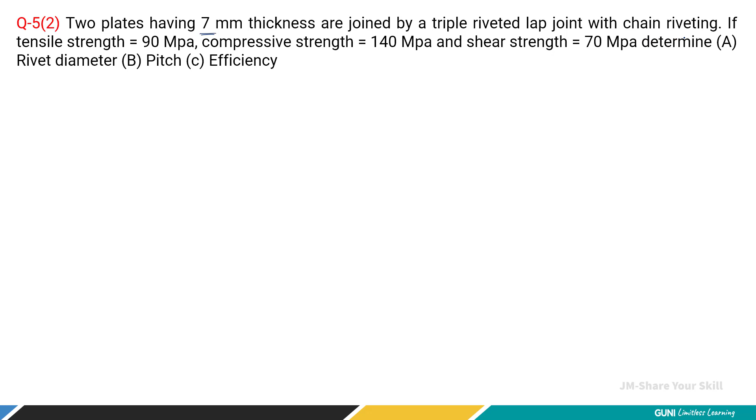Students, let's solve the problem of riveted joint. Question number 5 from assignment 2. Two plates having 7 mm thickness are joined by triple riveted lap joint with chain riveting configuration. If tensile strength is 90 megapascal, compressive strength is 140 and the shear strength is 70 megapascal, then find the rivet diameter, pitch and efficiency.

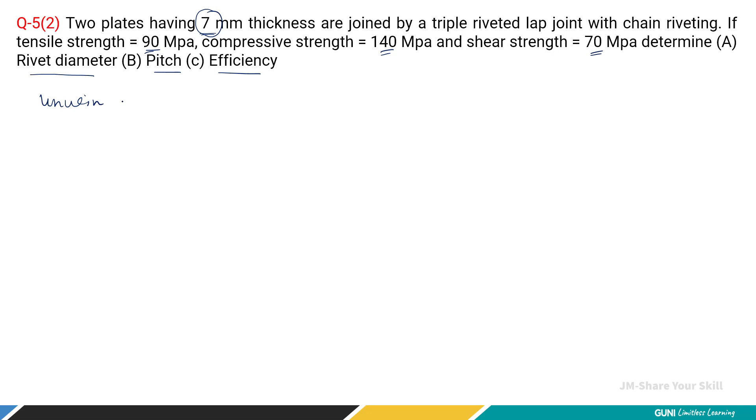Now here the plate thickness is 7 mm. As per Unwin's formula or Unwin's theory, when the plate thickness is equal to or greater than 8 mm, you can use rivet diameter d = 6√t to find the rivet diameter, right? But here the plate thickness is 7 mm, so we cannot use this formula.

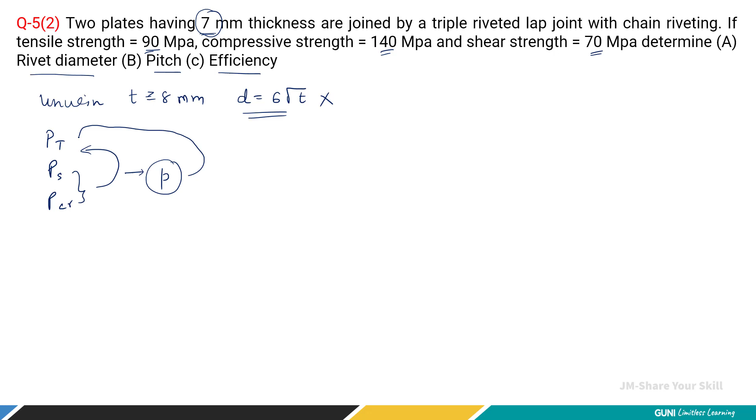So first we have to find out the tearing strength, then shearing strength and crushing strength, right? Out of the shearing and crushing strength, whichever is less must be compared with the tearing strength, then we can find the pitch. Once we find the pitch, we can replace that pitch value in the tearing strength to find out the rivet diameter. So this is our workflow, because the plate thickness is 7 mm, you cannot use Unwin's formula.

So let's continue. Tearing strength of plate Pt is equal to (p minus d) into t into sigma t. Pitch is not known to us, even rivet diameter is not known to us, only plate thickness 7 mm is known, and the tensile strength is 90 megapascal. So let's simplify the equation. It is 630 (p minus d) Newton.

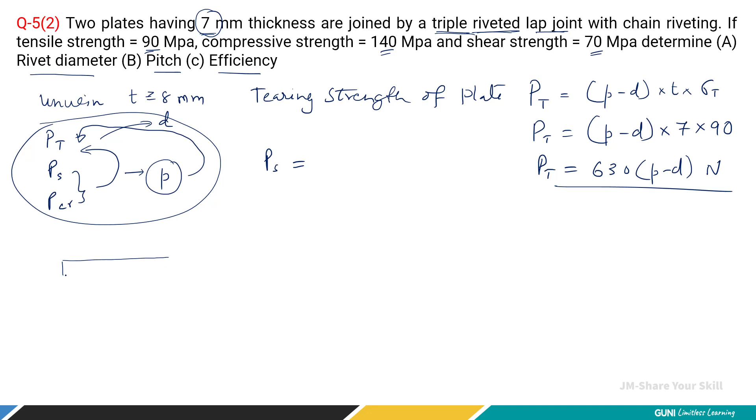Now shearing strength: here we have to consider the type of joint. It is a triple riveted lap joint. If I draw the simple configuration to understand what is given in the numerical, this is lap joint, and here we have 3 rows of rivets. So n is equal to 3. Ps is n into pi by 4 d square into tau, with n equal to 3 because it is triple riveted.

Then pi by 4 d square into tau. The shearing strength is given as 70 megapascal, right? So let's put 70 and simplify the equation. It comes out to be approximately 165 d square Newton.

Now let's find the crushing strength. The crushing strength equation is again number of rivet rows n into d into t into sigma cr. Let's take n equal to 3 as it is a triple riveted lap joint. Rivet diameter is not known, the plate thickness is 7 mm and crushing strength is 140 megapascal. Simplifying, we get 2940 d Newton.

Now we have to compare the shearing strength and the crushing strength of the rivet to find out the rivet diameter. So we equate Ps equal to Pcr: 165 d square is equal to 2940 d. We cancel out one d and find the rivet diameter. It comes out to be 17.81, and we take the approximate round value of 18 millimeter.

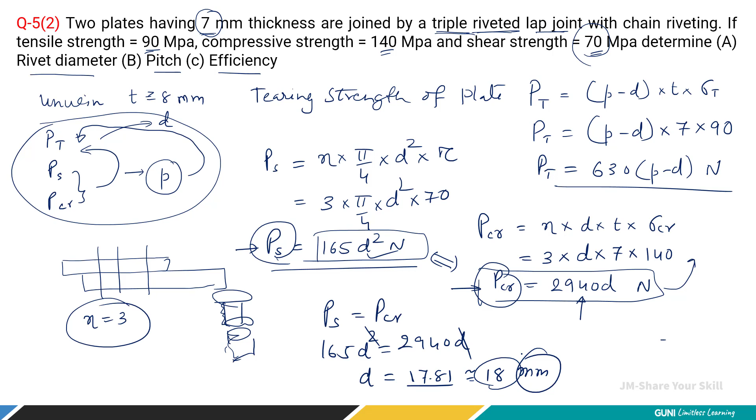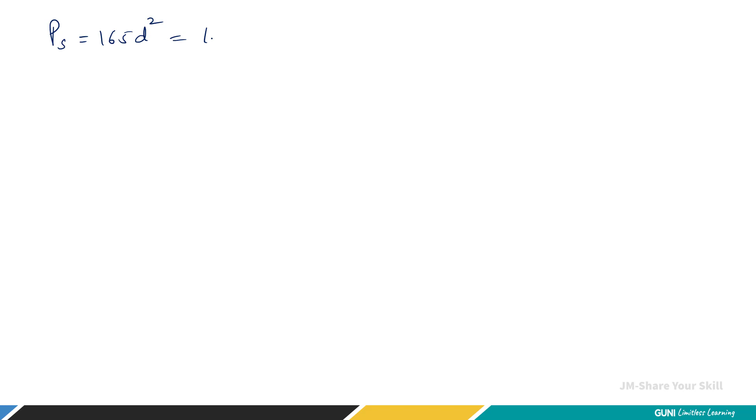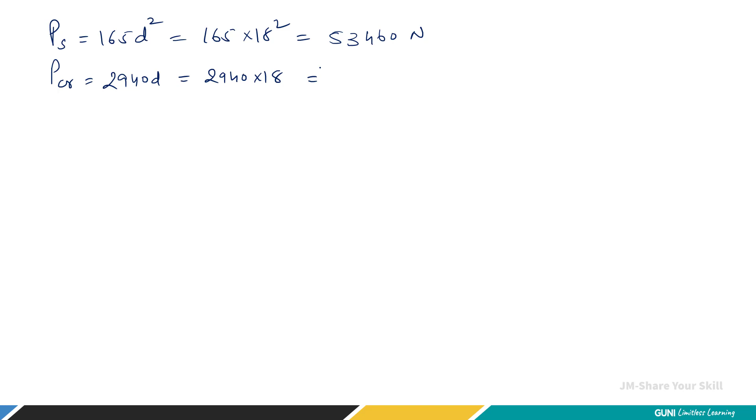Now we have this value of rivet diameter, so let's replace it in the previous equations. Shearing strength 165 d square is now 165 into 18 square, so the answer is 53460 Newton. Same way, crushing strength is 2940 d, so 2940 multiplied by 18 is 52920 Newton. Now this is minimum, right?

So we are going to compare it with the tearing strength of the plate, Pt equal to Pcr. Pt is 630 (p minus d), equal to 52920. We already found the rivet diameter 18, so let's replace that value: 630 into (p minus 18) equals 52920. The pitch comes out to be 102 millimeter. So this is the pitch value, and the rivet diameter is 18 millimeter.

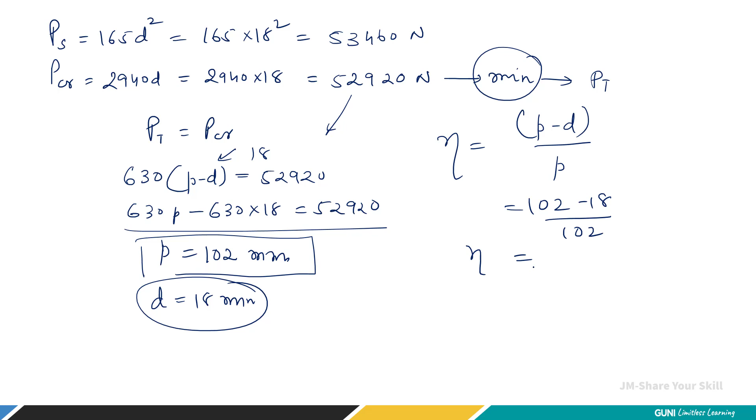Now let's find efficiency. Efficiency of the rivet joint is pitch minus rivet diameter divided by pitch. So it is 102 minus 18 divided by 102. So the final answer is 82. The efficiency of the given rivet joint is 82%.